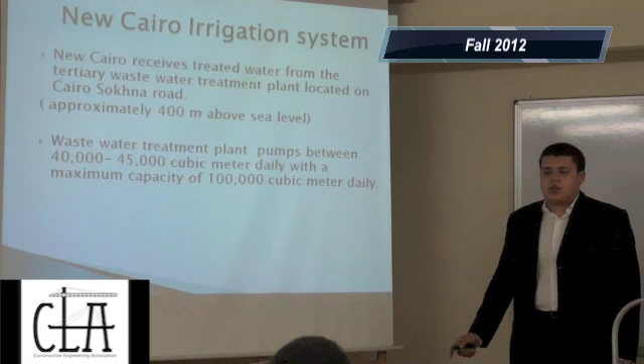New Cairo irrigation system. New Cairo irrigation system receives treated water from the tertiary wastewater treatment plant. It's located on the Cairo Sokhna Road. It's approximately 400 meters above sea level. Furthermore, the wastewater treatment plant pumps around 40,000 to 45,000 cubic meters daily with a maximum capacity of 100,000 cubic meters daily.

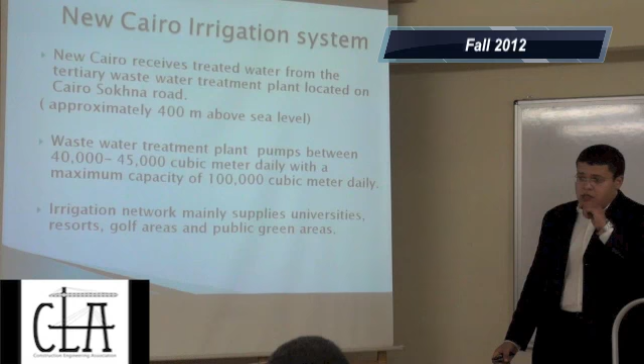The irrigation network mainly supplies universities such as the AUC and other universities, the resorts, public green areas, and golf areas. A lot of problems have been raised in the irrigation network: excess pressure failures in some loads, which causes excess water flows.

Our objective is to design the irrigation system with all its components, taking into account the fluctuation in demands, the balancing tank, and the design of the pumping station. We will use different scenarios until we reach the most economic, feasible and safe system. My colleague Ahmed Barakat will continue the rest.

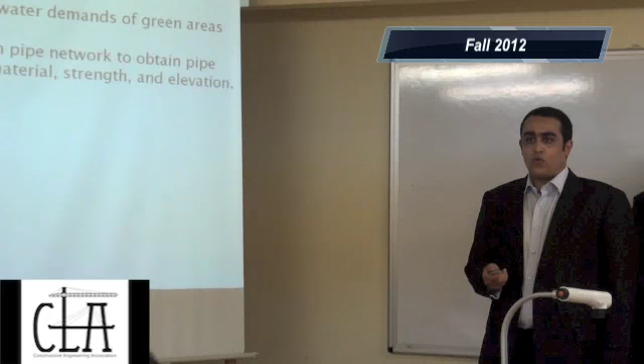Our scope of work is mainly designing the irrigation system of New Cairo. We will start by calculating the irrigation water demands through estimating green areas in New Cairo. Then we will design the irrigation pipe network to obtain pipe diameters, material strength, and the pipe layout.

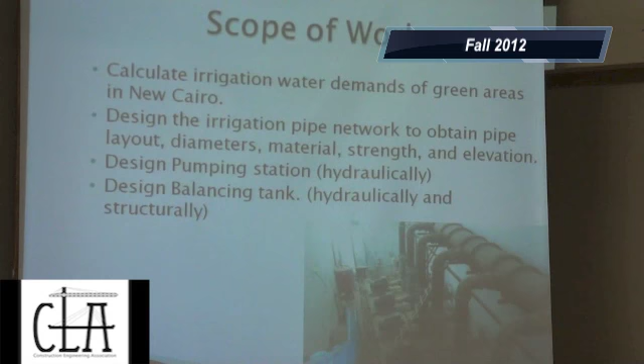And we will design the pumping station hydraulically to find the number of pumps needed, the type of pump, and the pumping head. And this is the real pumping station in the water treatment plant. We will also be designing a balancing tank, hydraulically and structurally. The balancing tank has a capacity of half a day or a full day of daily supply.

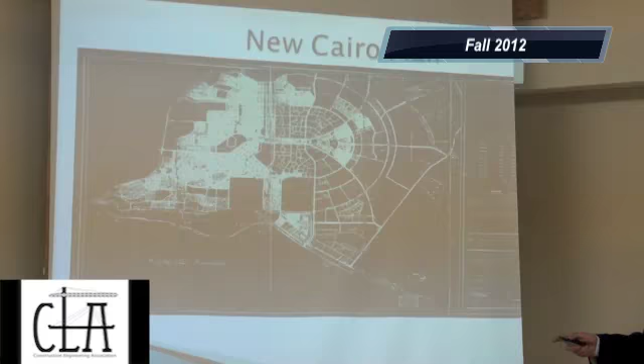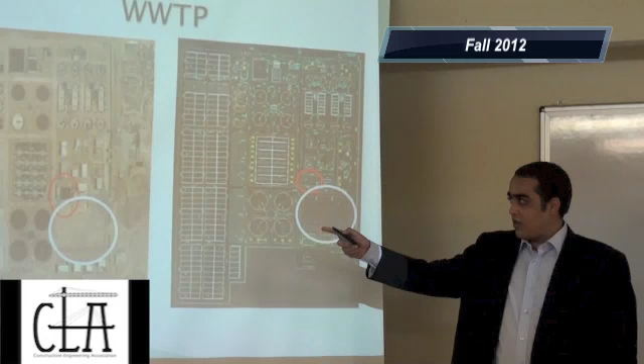For the wastewater treatment plant, we have also an AutoCAD plan and a Google Maps plan. The white circle is the location of the balancing tank. It does not exist nowadays; it's still under construction. The red circle is the pumping station and the chlorination tank.

In normal operation, the pressure is lost through the pipes in friction, so the pressure does not accumulate in the pipe. However, in low demands, the pressure accumulates in the pipe. This may cause a challenge for us while designing. We have to design for normal operation and low operation.

About the data required for our project, we need to first begin with the drawings we need: the physical plan of New Cairo and the topography of New Cairo, so we can lay out the pipes, valves, and pumping station according to the green areas and the roads, and also find the elevation of the pipes and nodes.

There is a group of aspects which will affect calculating our water demand, as the water demand is the most important part in the design criteria of our project. So we are trying to approach an estimation as accurate as possible. The aspects are as follows: the different demands in the different seasons, the type of plant that we will irrigate, and the type of soil, so we can assume the ratio of runoff and

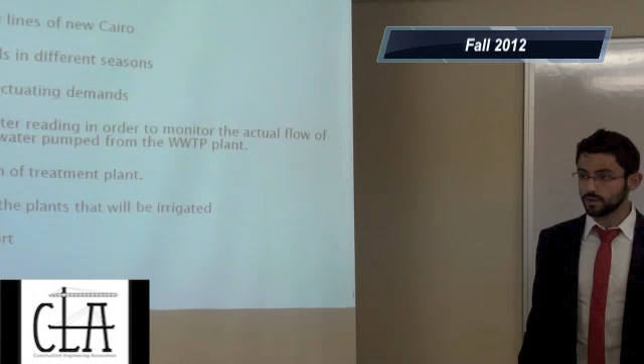drainage. Also the daily fluctuating demand; we want to find the profile by using a flow meter which will be authorized from AFC. This flow meter will be connected to the outlet pipe from the wastewater treatment plant to find the profile. We will need the elevation of the treatment plant so we can find the type of balancing tank we will design, and also the pumping head of the pumps.

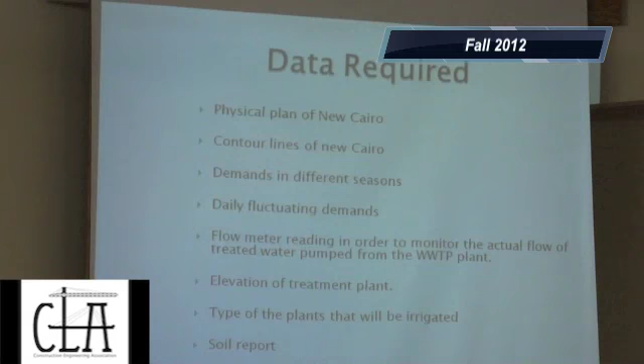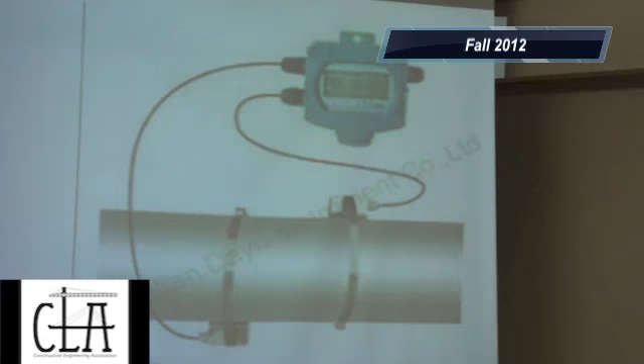There are many design criteria. As I said before, the water demand is one of the most important design criteria. From the Egyptian code we will retrieve many limits related to our project. There is also a way to calculate the losses in the pipes. Pipe safe velocity: we have to make sure the velocity is within safe limits, because if it exceeds the limit, abrasion will occur in the inner walls of the pipes.

We will choose a maximum pressure for all our pipes. For example, the current network has a 10 bar maximum pressure. Also, we will look for the local market pipe diameters, which will affect our pipe selection. And now we move to the

Here are the programs that we will be working with. The main program that we will use is AutoCAD in the design of the network. We will also use AutoCAD to read soft copies of available plans. We will use Google Earth to calculate the green areas and get the elevation of the roads, and it will help us in laying out the network. We'll use Excel to perform the calculations and functions required, and we will use SAP in the structural design of the balancing tank.

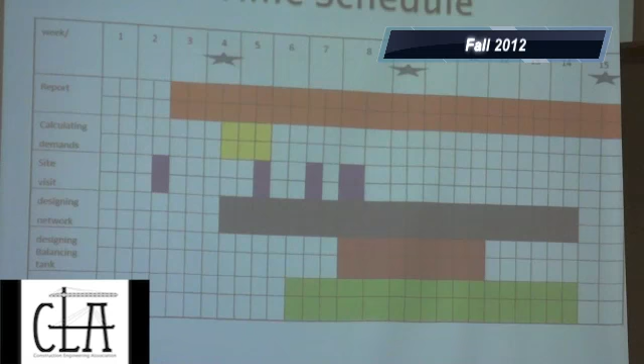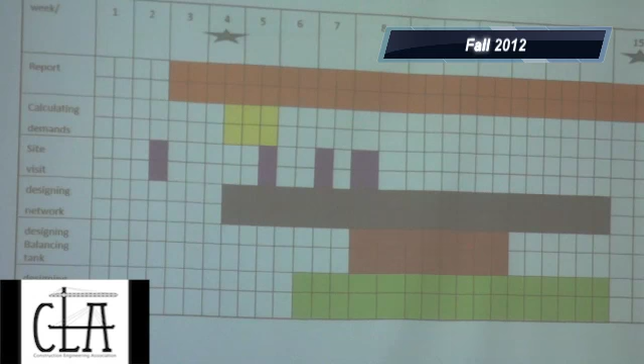Due to the current circumstances in the New Cairo campus, our activities have been delayed and we're unable to come up with an exact time schedule. However, our activities will be mainly the design of the pipe network, the balancing tank and the pump station, which will be ongoing activities till the end of the semester. We are hopeful that by next week we're able to calculate the demand and use Google Earth to locate the pipe locations. Here are the references that we used.